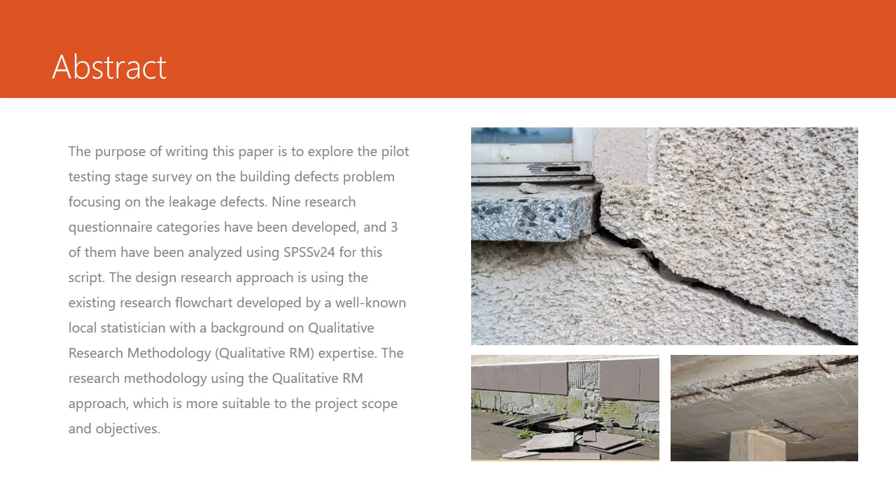9 research questionnaire categories have been developed, and for this paper 3 of the questionnaires have been selected and analyzed with SPSS version 24. The research approach uses an existing research flowchart developed by local statisticians, with the background of qualitative research methodology. The research methodology uses the qualitative approach, which is more suitable for the project scope and objective.

The next part of the paper is the introduction.

This paper focuses on the most common defects in Malaysia, which is the BLD, building leakage defects. Leakage defects require special attention among the industry players, the construction players, and strategies must be drawn on how to overcome or minimize this defect systematically.

In general, the defect may occur from poor design, low-quality workmanship. The building constructed not according to plan, and there are many factors, including design factors, as mentioned by the National Building Agency.

These primary causes may operate in combination, resulting indications of changes in the composition of the material, the construction itself, and so on.

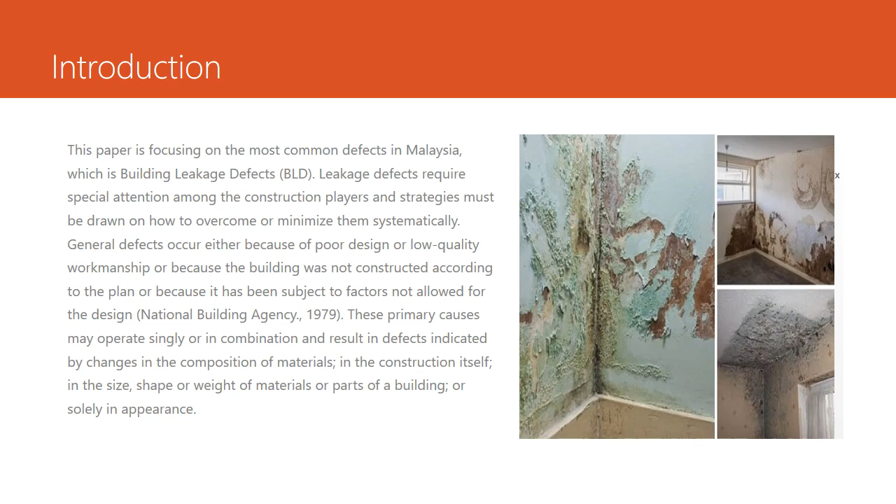As far as the literature research mentions, there are a lot of things to be learned from the history of buildings with the roof space of old buildings. The primary defects are likely to be found either at the top, at the roof, or at the bottom, meaning that from below or the floor level the water can rise up, or from the rooftop. So great care should be exercised when we are talking about structure materials within the roof.

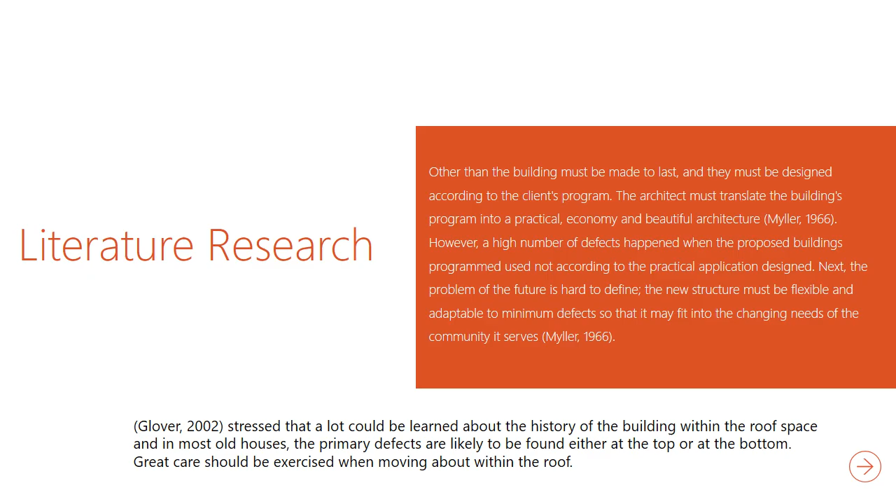Now, this is the research flowchart that I use, developed by local academicians quite recently in 2006. You can focus on the blue part, or the rendered one, and even the green. Start with the start there, the problem formulation, and the theoretical and conceptual model. We come up with that, and survey fieldwork, finalize the questionnaire, and then we do the pilot testing from here.

We get the expert opinion, and then proceed if yes, and go to prepare the draft report after we identify the site cases, the case studies, conduct observations. Then this will lead to the final exercise, the final survey, but we run the pilot test first.

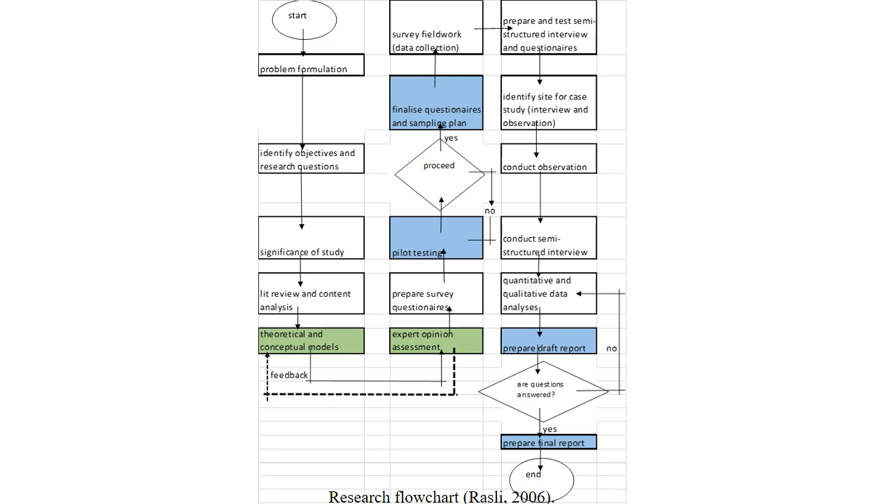Now, we also came up with this sort of graphic manipulation representing the basic building construction process, started from design, product, and post-construction. The design, from the layout, the detail, the design clarity, all this potential for generating defects, all the specifications, the weather friendliness, even green aspects maybe should be here. Post-construction includes the fire safety factor, the workmanship, maintenance, and the usage of the space that we design. Is it according to the design, or is the use of the space not according to the design?

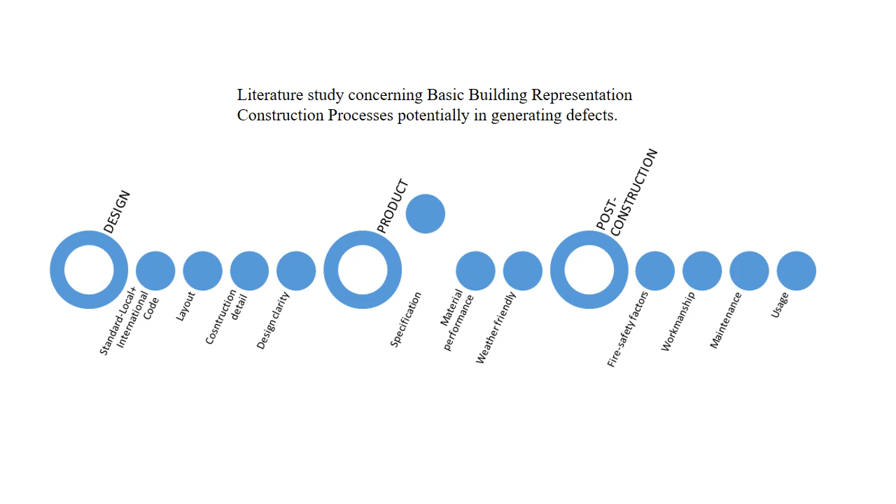Now, this is the schedule or table that I formulated on the questionnaire targeted to the industry players for the pilot testing.

Before we finalize the exercise, the survey, we come up with the pilot testing first, to check whether the formula is in order or not. So I formulated about 9 variables here, concerning the affected internal area, the value of the damage, the source of the leakage, the effects criteria, the material used in solving the leakage problem, the defects problem, future recommendations, and anything else the participant wants to share.

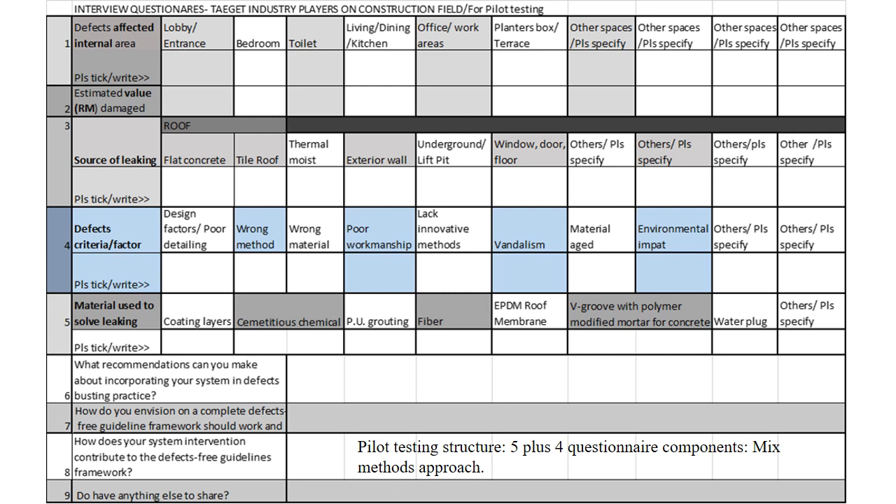Now, for this paper, only questionnaires number 3, 4, and 5 have been proposed, because I think this is appropriate for this paper.

So I selected questionnaire number 3, 4, and 5. Number 1 and 2 were already elaborated in an earlier article due to limitations. So Q3, Q4, and Q5 will be tested with the statistics formula, whether it fits or not to the theory.

For questionnaire 3 and 5, as well as Q1 and Q2, all respondents are highlighted based on job income categories, from 5,000 to 50,000, 51,000 to 500,000, or 500,000 to 1 million, or more than 1 million. It has been categorized as that.

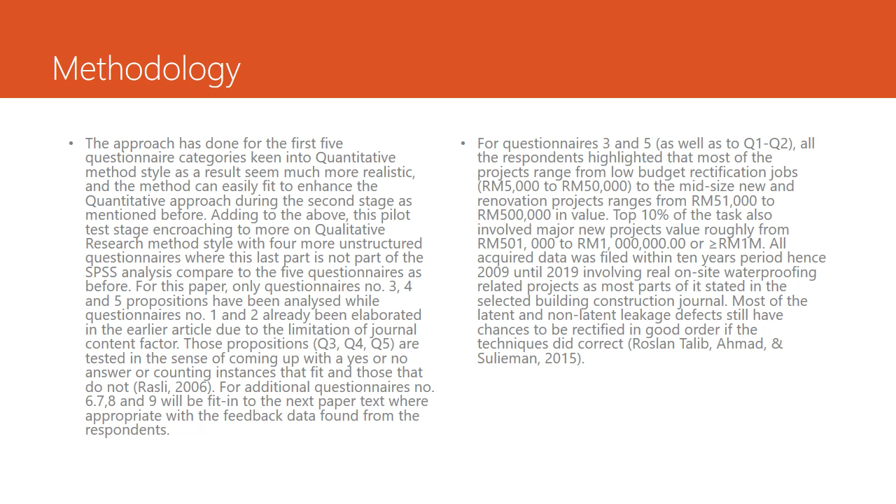So we assume the BLD, the leakage of this waterproofing system, whether it's in the roof, from the wall, or from the floor. Either this defect is latent or non-latent, which will have to be rectified and have to have a good technique to do the correction.

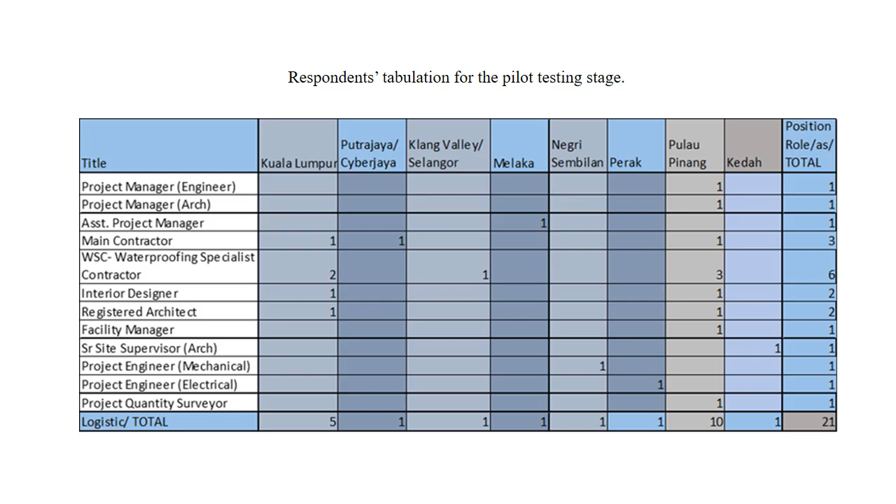We have 3 tables to be studied here from those 3 questionnaires. So this is the first table, table number 3 from the paper. And we use version 24 of SPSS. It's analyzed on the BLD sources, building leakage defect sources.

So here we got SD, standard deviation, the mean, the variance, and the skewness. You can take a look here. This is the N, which is 21, the 21 people who were involved. So we will talk about the statistics later on, how it has meaning to the BLD sources.

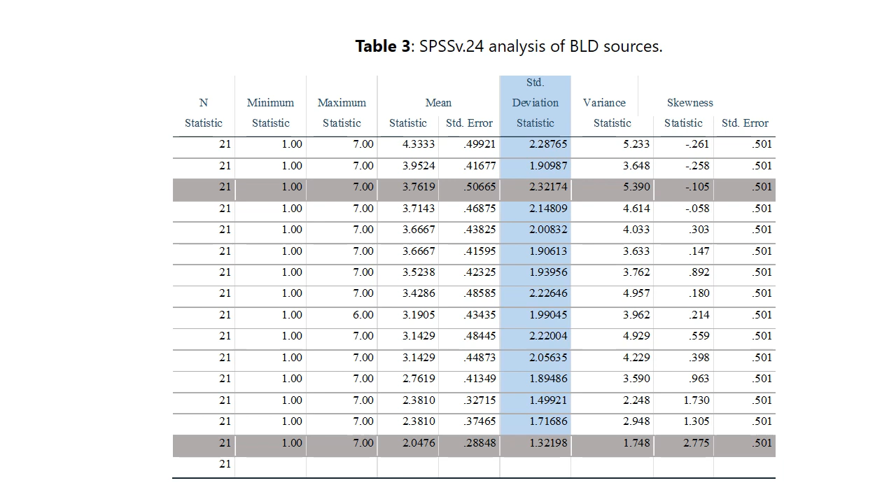The idea of this statistics test is to determine which internal and external space has had the most impact of the defects. So it seems like it's focusing more on the BLD, which is the intention of the study.

Most of the respondents understand that rainwater is a problem here, damp rising, which is from water, high water tables, water problems, and so on.

So for the SD statistics, the space having a roof using a roofing tiling system had the highest number, which is 2.32174, indicating that this space was having the most source of defect problem on the building leakage.

So the SD analysis stated that the space having a roof, using a roof tiling system, this SD indicates that the higher the SD, the more spread out the number, while the lower SD implies that most of the numbers are close to the average.

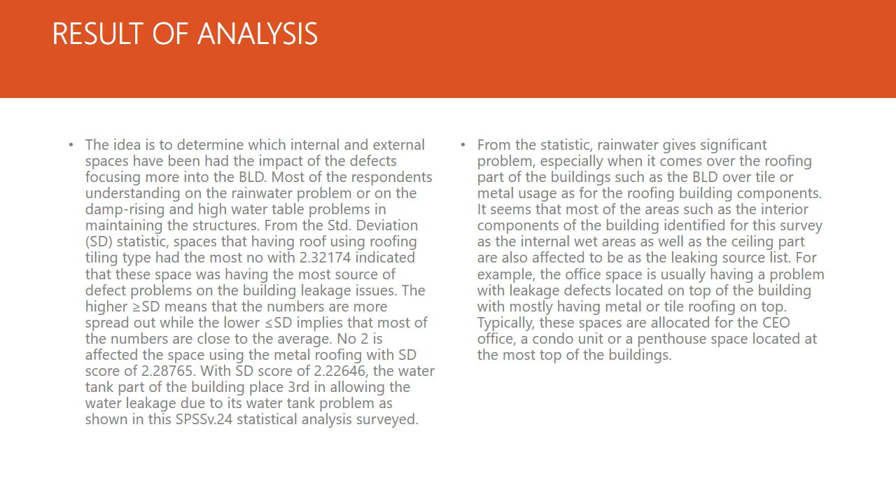Okay, now this is on the mean. X is equal to 4.333.

The mean, you can take a look at table 3 in the report, which is again the most problematic part of the building component, which is metal roofing. I have quite a big problem from the experience of the 21 people. Number 2 is 3.95 on the external wall, while tiling roof tile is number 3 with 3.7619.

You can take a look in the report later on, and the skewness statistics also somehow prove that the leakage sources are from the water piping, from the aircon water piping, and the CFR. This is very important, the CFR, concrete flat roof, especially within the internal space of the structure, as these 3 parts rated highest in the skewness statistic. You can take a look at table 3, then this is the analysis indicating which part is the most problematic from this pilot test survey.

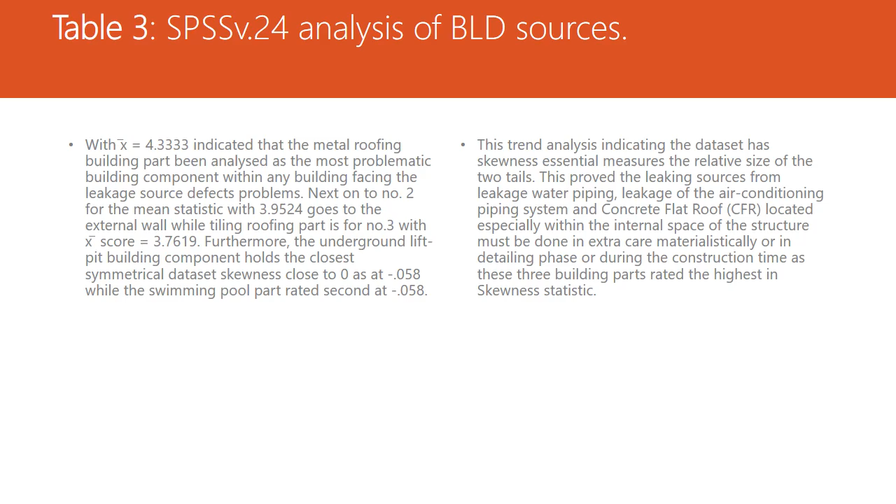Now we're moving to the next one, table 4, using the same statistics software, SPSS version 24, provided by USM. This is the analysis of the BLD criteria factor.

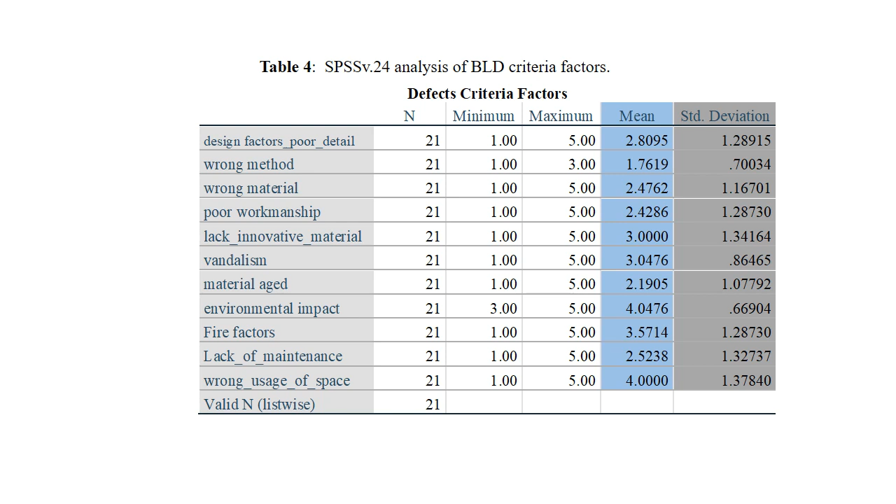We have here about 9 variables for the design factor: poor details, wrong method, wrong material. You can read through here until the last one, which is wrong usage of the space. We have 21 people in the industry, n equal 21. Then we have here the mean and the SD again.

I'm sorry, it's 11 labels. The result of the qualitative unstructured interview done, where more of the internal space has been identified for the analysis. It could be from the unstructured interviews done here. So let's see what is the result here of the 21 people in the industry, from project managers to architects to interior architects.

The standard deviations found that lack of use of innovative material has SD equal to 1.34164. Lacking of maintenance is number 2, with SD equal to 1.32737. And its ranking is at number 3, so there's its position.

So while the problem seems to be emphasized on the defect criteria, the lowest ranking goes to the wrong method, or wrong rectification work system to overcome the problem.

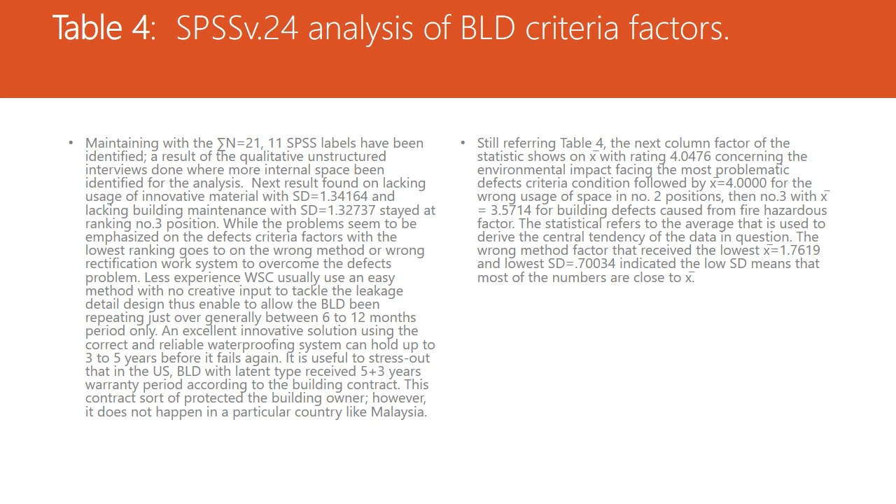And then number 3 has a mean of 3.5714 on the fire hazard factor. They have defects due to fire, like the fire extinguisher not working, things like that. So it's not working, using non-fire-retardant material for the interior, that's also considered a defect from the survey.

Now this is table 5, the third and last table to be discussed in this short paper, again using SPSS version 24 to analyze the BLD material and part usage used to solve the leakage.

So we have here, starting from the coating layers: cementitious liquid chemical, PU grouting, fiber, EPDM, V-groove, water plug, PU, liquid membrane, silicone, acrylic polymer, and bituminous membrane is the last one, involving 21 people. This is the material, especially these waterproofing materials, I consider it like BLD, building leakage defects, coordinated mostly from the water. It shows here the mean, the SD, and also the skewness.

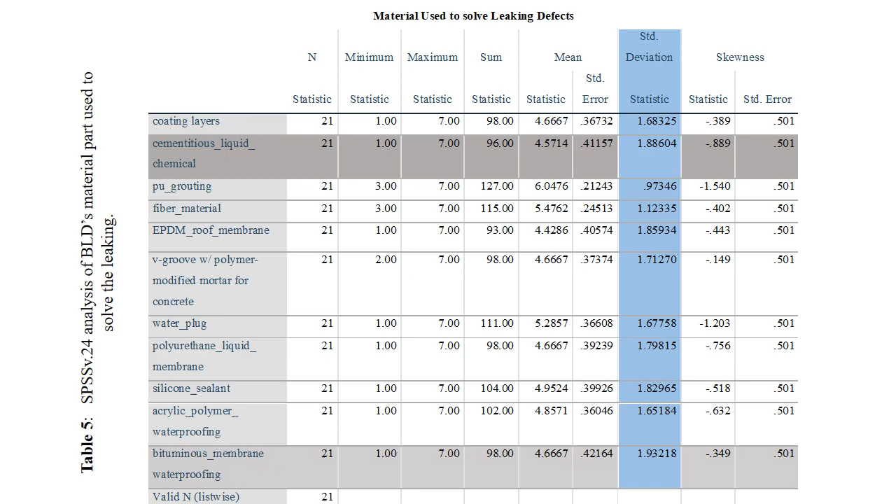From the statistics computation, it seems like the BWM, the bituminous waterproofing membrane, the typical material that covers the roof part, especially on the CFR, holds the most problematic material use with an SD score of 1.932. So wow, this is quite shocking, this BWM, a typical material being used in Malaysia.

Okay, mostly I think it's imported materials. Yeah, definitely it's mostly imported. Still having a lot of problems. So it must be the technique of installing it. Maybe wrong technique, maybe when they install it the weather is not that hot after the raining, it's not really dry, and then they proceed. Very poor lapping and things like that. This needs to be identified.

For example, one of the materials from France, like Axter, which is distributed in Malaysia. But the thing is, from my experience, this is how the applicator applied it to the flat roof, especially the lapping, and where it meets the corner, meets the wall on the rooftop. How's the detail like, and things like that.

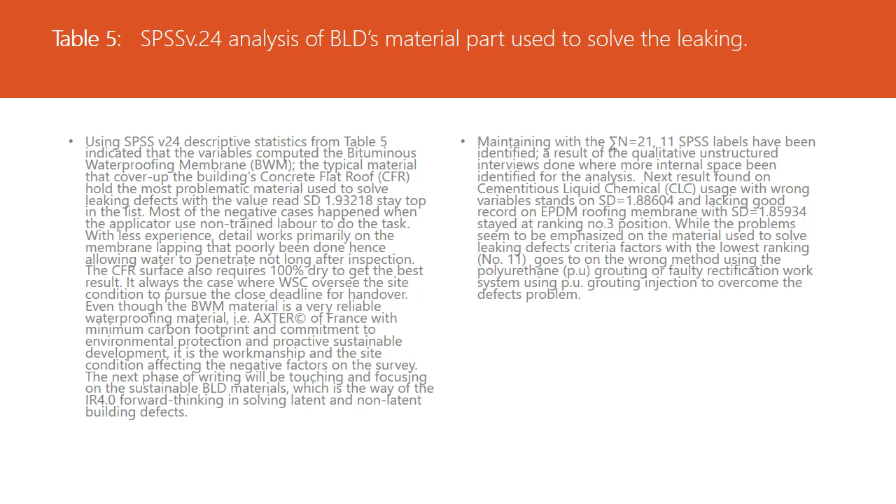Still referring to table 5, the mean rating, which is 6.0476, concerning the PU, polyurethane grouting injection technique, impact is the most problematic material to solve these defects.

I think this is quite true, because when you have leaking defects, most of the WSC like to apply PU, which to me is just like a temporary measure. After it's not properly done, in 6 months or 3 months it will leak again. And this is a typical solution - whenever they have a leakage on the slab, concrete slab, this is the PU, injecting grouting, PU grouting.

Then in 3 months, if in December there's more raining, it's less - I mean like 6 months. If in December, monsoon season, especially even on the western coast from the Malay Peninsula, still have problem, not even 6 months. I would expect, if not properly installed, like 3 months.

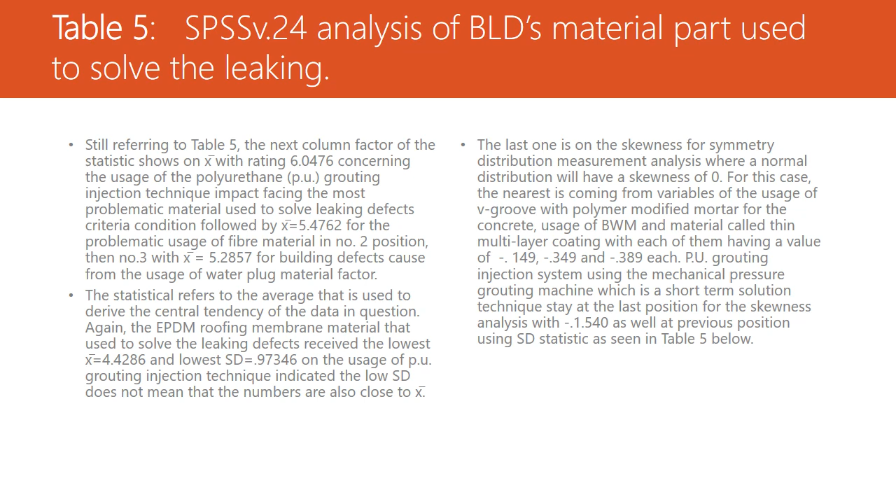Okay, and we got here the skewness, symmetrical distributions over here, which is the variables. Consider the V-groove with the polymer modified mortar for the concrete usage of the BWM, and the material called multi-layer coating have values of negative 0.149, negative 0.349, negative 0.389, and this is all the material that needs to be noticed, as per table 5 in the report.

Now, this is like the end part of the report.

To summarize the statistics analysis with the 21 respondents, the statistics show that most of the mentioned building components are facing severe building leakage. We mean the building components in the roof part, the wall part, all four walls of the basic building, and the floor, which is the lower part of the components, all having a problem there.

So only focusing on the waterproofing defects of the building component, will defects still happen to other areas, focusing on other defects criteria? Building interior elements can be considered among the essential parts of the building. People spend 80% of their time inside the building rather than outside. So it's quite important how we treat building defects, because we don't want to stay inside the building with rain water right above our head.

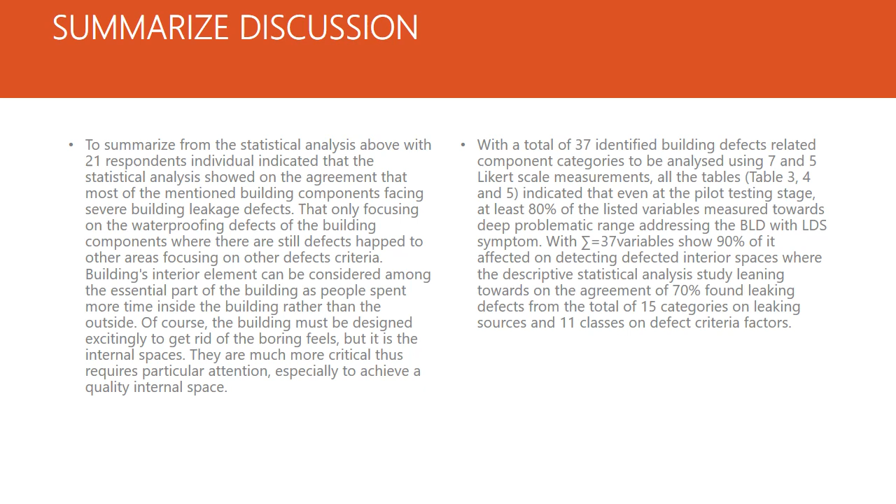Next, this conclusion part is that the leakage defects play a tricky game, as sometimes you can see the fault with naked eyes, sometimes it's not, meaning that sometimes it's latent, sometimes it's a non-latent defect game.

It's just like currently this COVID-19, this is a latent defect. You cannot see it. You cannot see this COVID-19 virus, but it affects people, people died. Same thing with the defects - you cannot see it, it's a latent defect, you cannot see it with the naked eyes.

So people think that the external building might look awesome, the external must look good, but they spend more time to develop how the internal space gets bombarded with all kinds of defects, complaints, from all angles. This requires a change of mindset in this industry player.

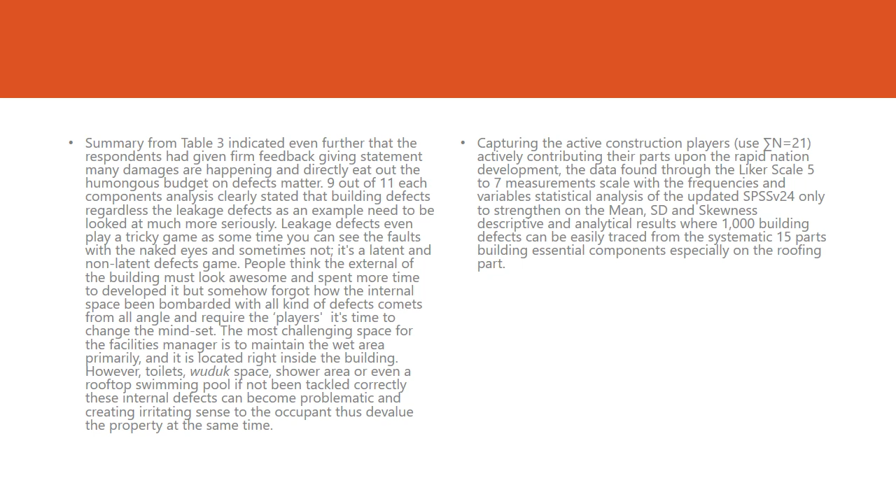You can read through that, the wet areas in buildings get a lot of problems. So from the survey of 21 active contributors to this sector, the Likert scale interviews and so on, with the mean, SD and skewness descriptive analysis result on about 1,000 building defects, from the systematic 15 building parts, the building components, especially on the roofing.

Now the last part of this conclusion is that the next phase of the study is to refine this pilot test and then refine further studies. We'll give a more comprehensive structure of the survey, the real survey, whether we do it in mixed mode, quantitative or qualitative approach, and fine tune the conceptual model, fine tune the RQ or RO, or even the hypothesis, as Schneider mentioned in his book in 1994.

We urge a view of what knowledge is required for all the industry players, especially property managers, WSC, in tackling the real defects.

So we hope that from that three level analysis and the selected questionnaire with that particular 9 variables, survey with the pilot test approach - I think the pilot test is very important to fine tune and direct which direction the real survey, real research of this particular topic should be done later on.